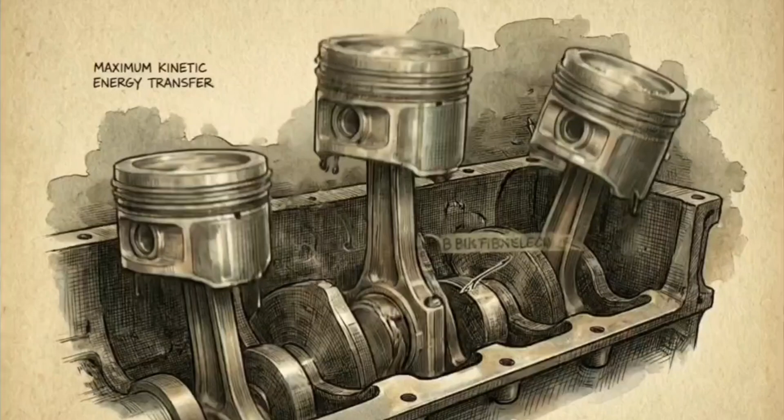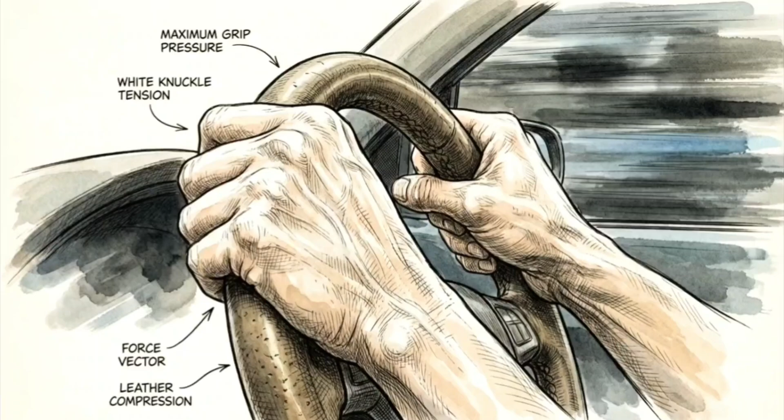For over a century, human transportation has been powered by a system of controlled violence. You can feel it in the deep vibration of the steering wheel, the roar of the exhaust, and the immense heat radiating from the hood. That sensory feedback is the result of a very literal, very physical chain reaction. We pump liquid fuel into a tight metal chamber, ignite it, and use the rapid expansion of those burning gases to forcefully shove heavy steel pistons up and down.

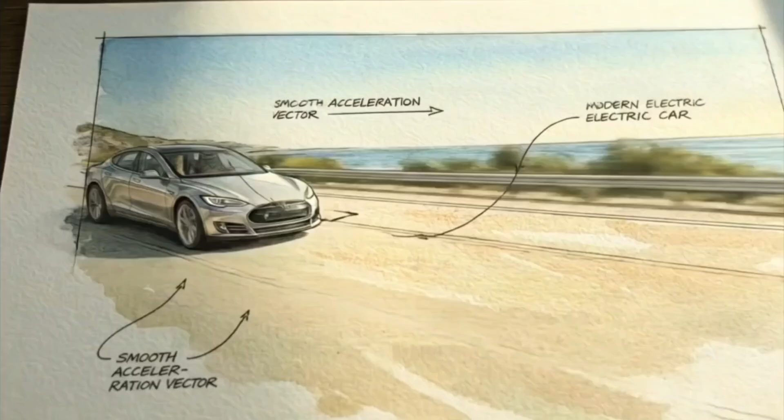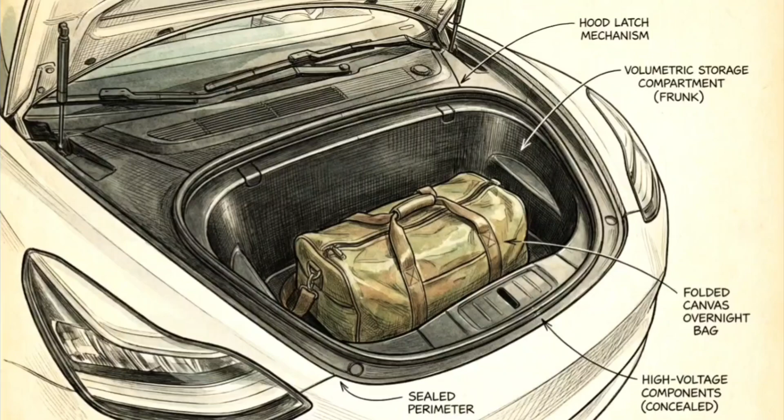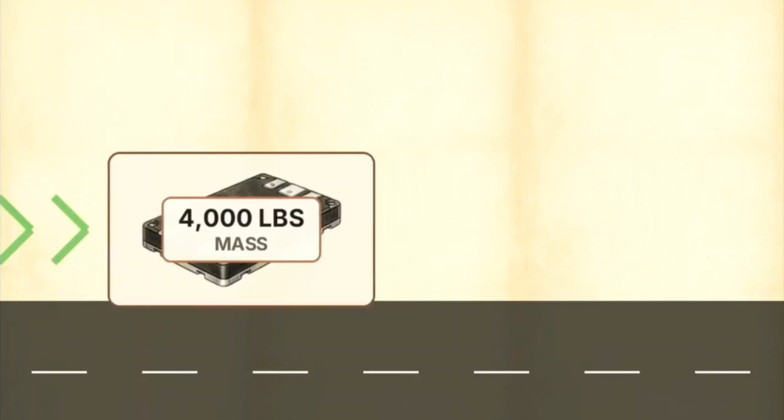But step on the accelerator of a modern electric vehicle, and the experience is entirely different. You get immediate, blistering speed, completely decoupled from the roar and the rattling. Underneath the hood, there are no miniature detonations happening thousands of times a minute. There is no tank of combustible liquid. There isn't even a traditional gearbox clicking through ratios. It takes an immense amount of physical energy to hurl a 4,000-pound block of metal down a highway. If absolutely nothing is catching fire or blowing up inside the machine, where is all that force coming from?

The answer reveals how transportation has moved away from chemical fires. We are now propelling ourselves forward using the precise, invisible manipulation of electromagnetism.

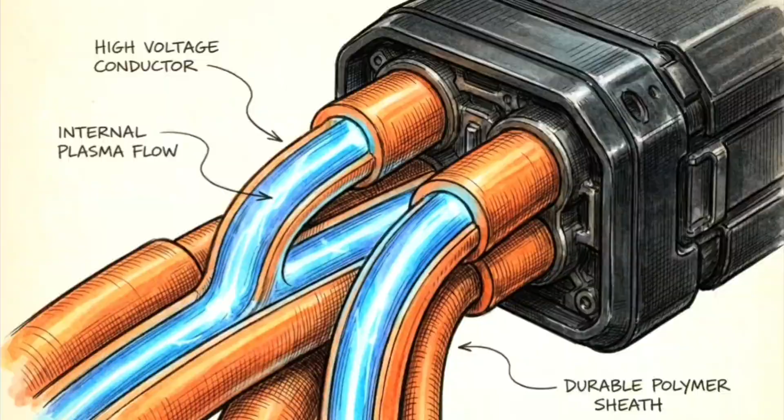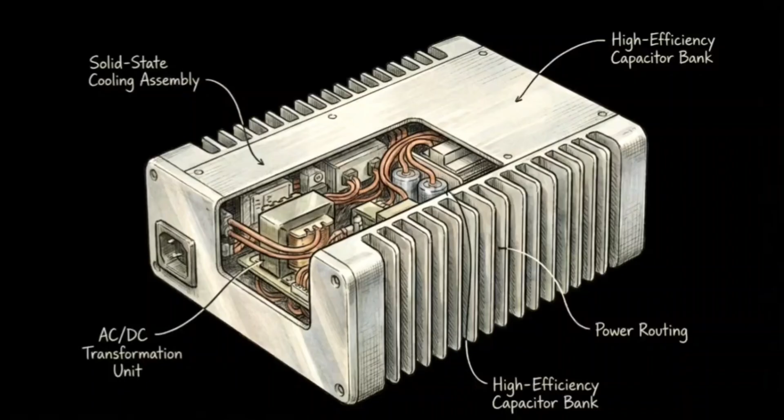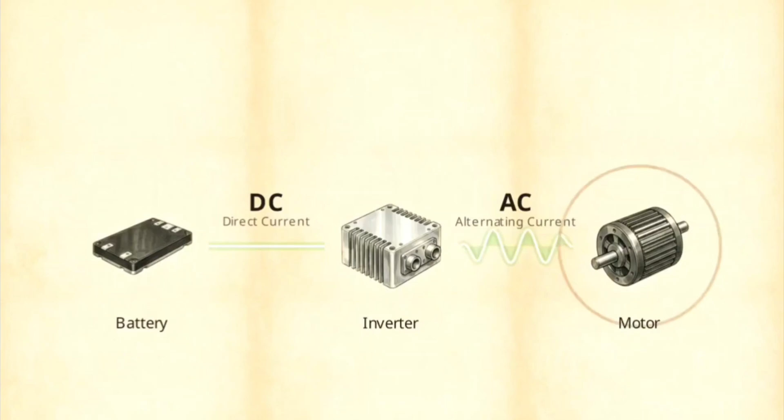That intermediary is the inverter, the operational brain and translator of the entire propulsion system. The inverter performs a structural transformation. It takes flat direct current and structures it into alternating current, a rapidly oscillating wave. This is an absolute requirement. Steady streams can't push heavy cars. Electricity needs to pulse to build shifting magnetic fields. Without the inverter carving that raw, flat power into a rhythmic wave, the battery's massive energy reserves would just sit there, trapped and entirely useless to the motor.

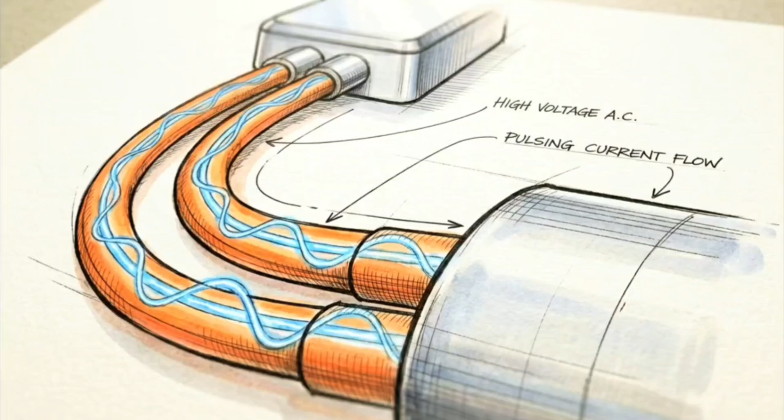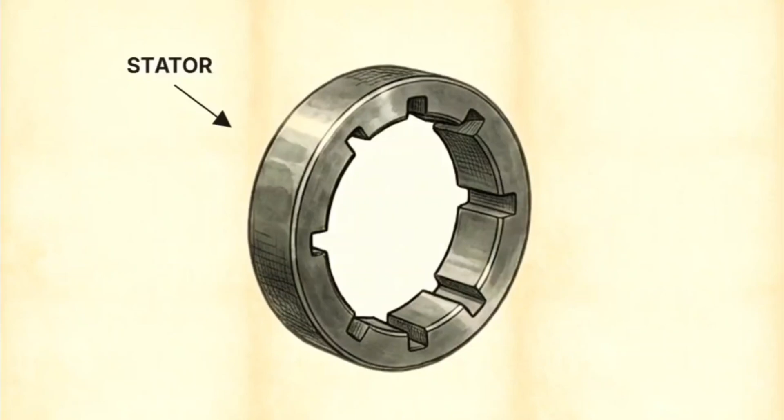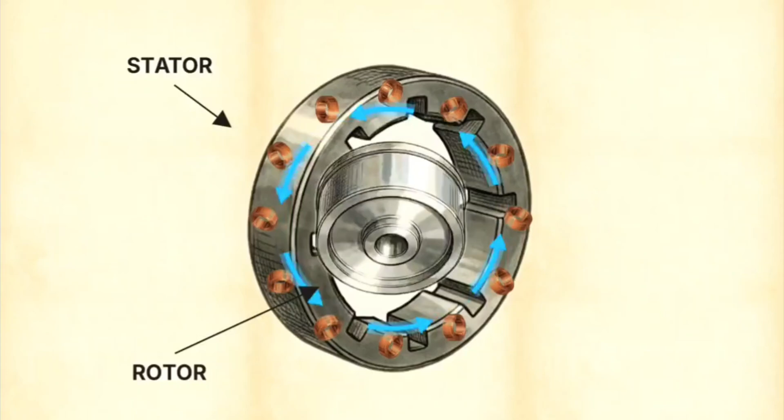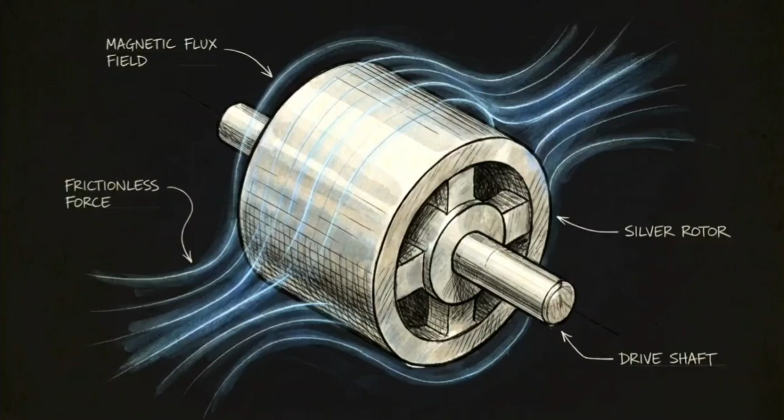Now riding that oscillating wave, the electricity rushes out of the inverter and enters the outer ring of the electric motor, a stationary cylinder packed with tight coils of copper wire, called the stator. As AC electricity travels through the stator, it generates a circular, rotating magnetic field. Suspended inside is the rotor, sitting completely free. The stator's spinning magnetic field grabs the rotor, forcing the inner cylinder to spin rapidly to chase that rotating field. Notice the total absence of friction, no steel parts slamming into walls. No gears grinding against one another. The inner cylinder is dragged purely by invisible forces of magnetic attraction and repulsion.

That rapidly spinning inner cylinder connects directly to a drive shaft. As the rotor turns, that pure rotational energy is sent straight into the wheels. Thousands of pounds of steel, glass, and passengers are physically hurled down the road by nothing more than copper wire and the tight, invisible grip of magnetic fields.

While this shift meets an environmental necessity, it also marks a move toward mechanical precision. We replaced a sprawling machine that constantly fights itself with a streamlined system that simply flows. The roar and the rumble of the highway are slowly fading out. We are now permanently trading the chaotic, lossy age of combustion for the quiet, frictionless efficiency of electromagnetism.